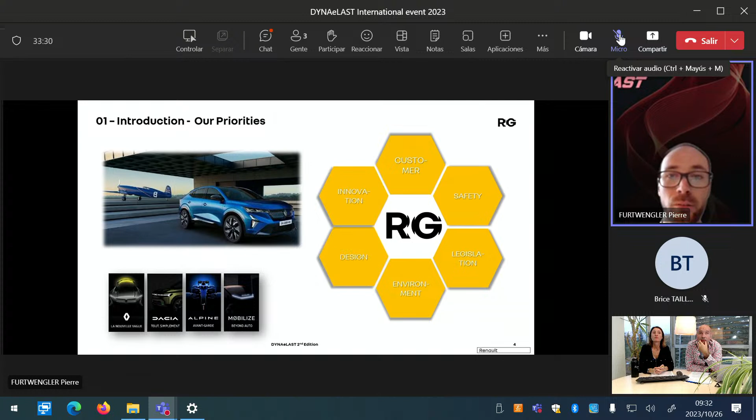Since 2020, we have a new CEO. Maybe you haven't heard about him. His name is Luca de Meo, and he started a new program called the Renaulution, which is from volume to creating value. For this, he created new entities inside of the Renault Group. So now we start to be divided into several entities.

So we have Horse, which has been created in July of this year, dedicated to low emission thermal engines. Then we have Ampere, dedicated to electrical vehicles, which should start in November of this year, so in 2 days. And then we have Alpine, dedicated to sport cars, Mobilize for new mobility and services, and the future is Neutral, which is dedicated to the circular economy.

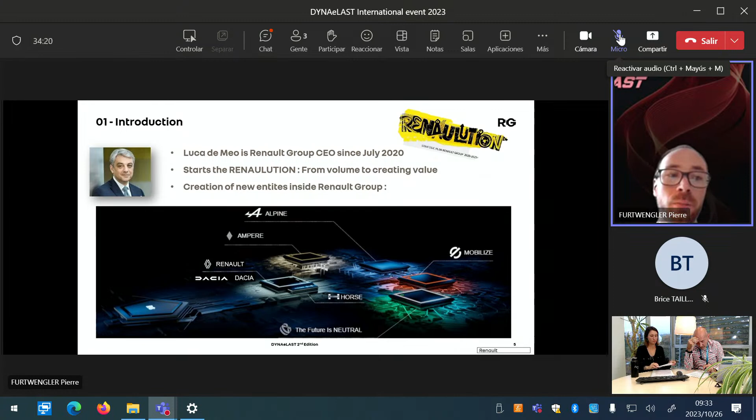Now let's talk about the Renault Group green policy. So as most of the big companies in Europe and in the world, we have to commit to decarbonation. Our road is quite simple in word, in theory, in practice not so much, but in 2030, we want to reduce our CO2 emission by 30% and increase by 33% the recycled material content in our car versus 2019. Then we want to reach carbon neutrality for all cars produced in Europe in 2040. And then we want to reach carbon neutrality worldwide in 2050.

To achieve this goal, we have several leverages, and now I will focus more on the material aspect, especially the polymers.

So first of all, we will start with this pyramid. This is the summary of our Renault Group green material strategy, as a philosophy, which means for Alliance specification philosophy. So you can see on the very top of the pyramid in red what we consider to be the least green solution, meaning the polymers with the highest emission of carbon dioxide.

In this category, you will find what we call the virgin polymers, so all the conventional polymers we are used to having. And then just under, you will find the post-consumer chemically recycled polymers, so the polyolefins and the technical polymers. This solution today doesn't seem to be too green for us, even if it is a recycled one, because the chemical recycling process still uses lots of energy, lots of chemicals, washing steps, and so on. So it is not so green at the moment, and it costs a lot, so it's not very good for us. But this is something we hope will change in the future.

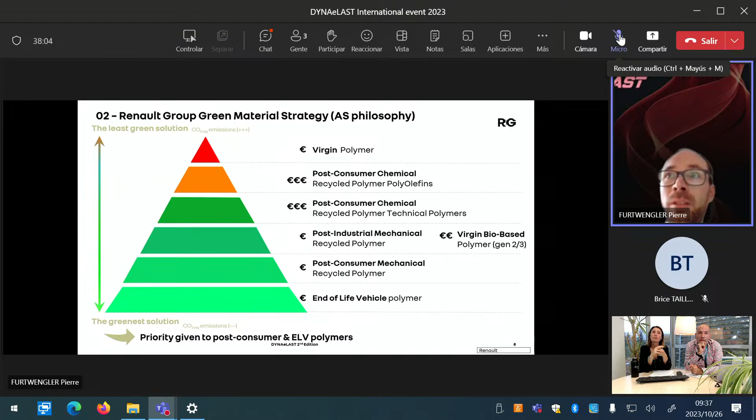Now, you can see on this screen that I'm talking about bio-based polymers. Bio-based polymers is something which is, let's say, quite complicated to accept for us, because we have to dedicate a clear strategy for the bio-based polymers to be sure not to go in a wrong direction. By this, what I mean by a wrong direction, we built a strategy which is based on the sustainable goals of the United Nations. It's a consensus, not a norm or a standard.

And what we decided is that we decided not to use any biopolymer based on edible biomass. This is what we call material from generation 1, which you can see here on your screen. We don't accept this kind of material because there is competition with the food chain, so we cannot accept to have any polymers from this category in our car. We don't want to have people asking why Renault is starving populations just to produce cars. So this kind of material, if you have a biopolymer made from corn or from whatever you want, from sugarcane, we cannot accept it. I'm sorry for that.

The other generations we have are generation 2A, 2B, and 3.

This generation, I think you start to know this denomination because we are not the only one to use them. So we can accept what we call material from generation 2A. It's by-produced in parallel of generation 1.

We will always ask for proof of traceability and sustainability, because it's okay to use byproduct, but we don't want to create an excessive production of one specific crop in the world just to have the byproduct, because it will make not a good balance between the production, and we cannot accept that either. So it is okay for us to have this material, but we need to investigate and be sure it is completely right according to our specification.

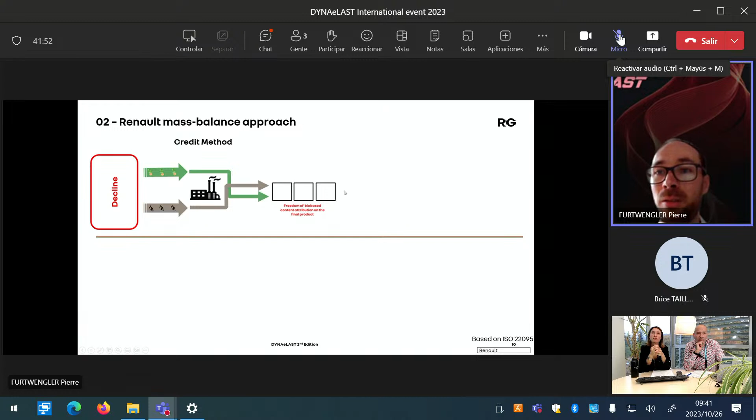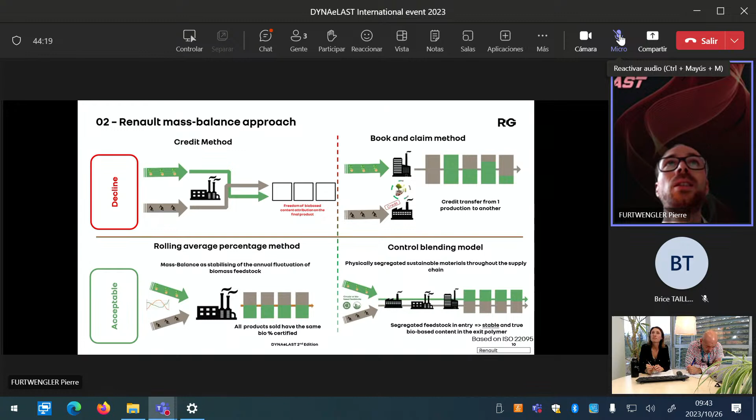As a conclusion, we do not focus on what we don't want. We want a clear positive view. We will accept everything that allows for true CO2 avoidance: mechanical recycling, renewable polymers as long as they're generation 2 or 3, post-consumer recycled material, and chemical recycling. But what we cannot accept is a credits method. We always want to be as close as possible to the truth. And we also cannot afford overcost on material just because it's bio-based or recycled—our cars are already expensive enough for our customers.

Now let's talk a bit more about TPE, especially TPE in electrical vehicles, and how they can help us on the decarbonation road, how they can help decrease CO2 emissions. Here you have an electric car, and the main difference with the internal combustion car: with a classical engine, to decrease CO2 emission you just had to decrease the weight or decrease engine consumption, and that was enough—you were decreasing your CO2 emission.

With an electric car it's much more challenging, because you have to work on the car assembly and maintenance, on low-emissive polymers and metallic parts, low-emission oil and grease, and also use bio-based materials, recycled ones, green chemistry and processes—for example in the battery—and bio-based coolant. So the strategy to decrease CO2 emissions of an electrical car is not the same as for an internal combustion engine car.

To give you a quick overview of the TPE parts in our car, we have several hoses, mainly in TPV. They can be recycled or bio-based compounds with low global warming potential—low GWP because in most cases they replace EPDM, and EPDM, due to the curing step and process which is closer to a batch process, has higher emissions. So each time we can replace EPDM with TPV, we decrease the CO2 emission of the car.

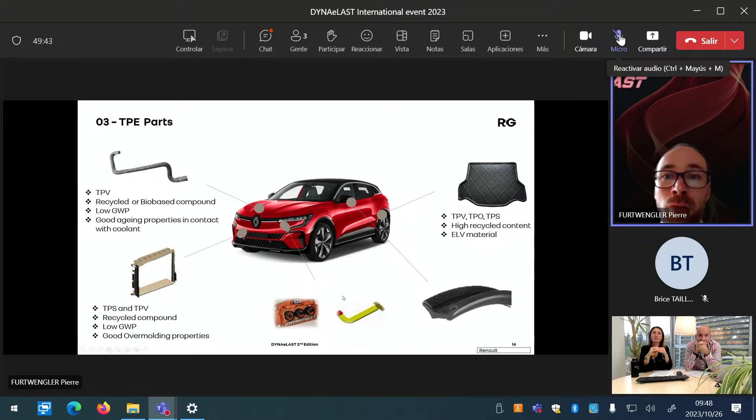If, unfortunately, a car has an accident, whatever it is, a crash or a defect, there is legislation that says that after a thermal incident, because you often have a thermal incident in your battery when you have a crash, you cannot have smoke inside the passenger cabin for at least 5 minutes, to give time for the passenger to escape.

So what can be at the origin of this thermal event, which can create this kind of incident in your car and battery? One example of interest here is the additive package you are using in the TPE formulation. We cannot use TPE close to the electric part or to the battery which have copper halide or red phosphorus inside the compound.

Why this? Because with water, you can have migration of the copper ion, and this can allow transfer of electricity between two parts. If one part is unfortunately close to the cathode and the other is close to the anode, you will have a short circuit.

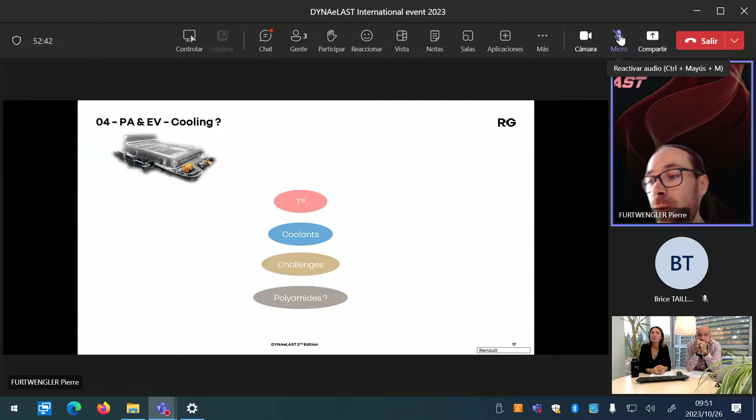As a short introduction, let's make a comparison between fuel cell and conventional electrical vehicles. First of all, the temperature of usage is not the same, because for the battery, if you are above 60-80 degrees, your battery is basically dying, it's not working well. So the battery is cooled with a conventional water glycol coolant, especially with a bottom plate under the battery. We can also imagine a dielectric coolant for direct immersion of the battery, but it is not currently used at Renault.

What is the main challenge for a battery? It is not the temperature, as you can see, but it is the high solicitation, especially of the cooling circuit, because you are cooling the battery when you are charging and also when you are discharging it. So you are almost always using your battery in an electrical car.

So what can be the challenges for TPE? It's TPV with recycled hydrolysis resistance, TPV with multi-layer hoses, and all the connections to the battery - mainly focusing on the cooling system because this is where you have the most TPE, but it can be other parts too. It has to be well designed for long-term hydrolysis resistance or long-term aging data, because even if the temperature is not so high, it's used most of the time.

Second aspect is for the fuel cell. So with hydrogen, what is the difference with the fuel cell? Currently, the fuel cell temperature starts at 80 degrees. It will certainly improve in the future to increase the yield of the fuel cell, but let's say that today it's 80 degrees. What is very important for the fuel cell - I mention the coolant here, but it's also true for the other circuits we'll see after - is to have a low conductivity water glycol coolant. Why? Because we don't want interaction between the fuel cell and the conductivity of the coolant, so it's important not to increase the conductivity of the coolant.

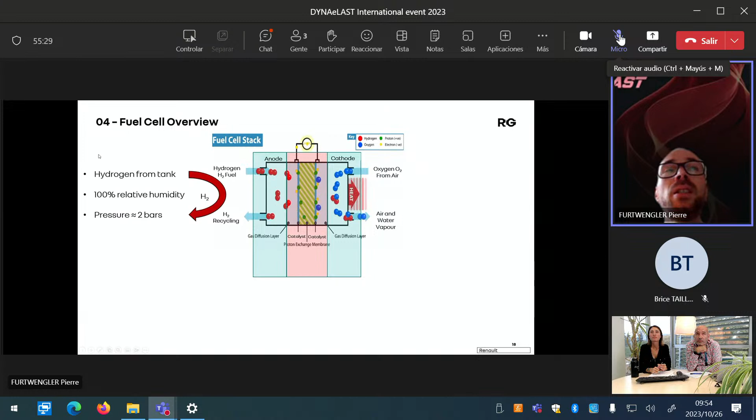On one side, you have an entry from the hydrogen tank. The hydrogen is not at the pressure of the tank, obviously. It is only 2 bars with 100% relative humidity at the anode. At the cathode, on the other side, you have dioxygen from the air, also at 100% relative humidity and 2 bars of pressure.

And the last circuit you have, very close to your fuel cell, is a cooling circuit with a conductivity set at a maximum of 5 microsiemens per centimeter, and we have a very high cooling rate.

All this circuit has hoses. These hoses can be in TPE, which is not a problem for us. I think 2 bars is okay, and 100% relative humidity is not a problem either.

But what is a problem with the humidity, whether it is in the oxygen, the hydrogen, or the cooling circuit, is if you have leaching from your material. So if you are taking some ions, some impurities, which will go inside of the fuel cell stack. Why don't we want to have this type of contamination?

Here are examples of contamination that you can have. You can have cationic impurities, organic compounds, or anionic impurities. Cationic impurities are mainly ions, extracted or leached from the compound. Why are they quite bad for us?

Because one of the main catalysts of the fuel cell is platinum. So if this metallic catalyst is poisoned by one of the cations, it will not work for the fuel cell. It will instead create another reaction with these impurities. So it basically decreases the yield of the fuel cell.

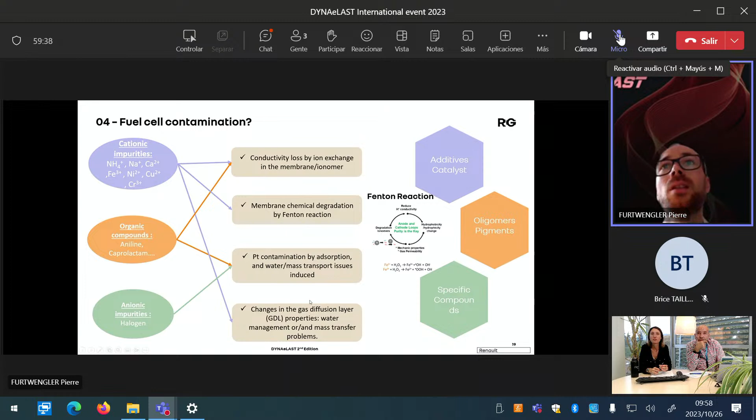In this specific idea, we started to initiate a protocol at Renault to try to investigate our materials. We share it with you because we don't know if it's the best one, so we are always waiting for feedback, and we are glad to share it if you think it's a good one also.

You can use it. So we take samples to try to always have the same surface of exchange between the sample and the media, and our media is ultra pure water. We use the ISO standard for traction, the ISO 527 1A, cut it into 2 pieces, and put them in 250 milliliters of ultra pure water in a glass bottle with a cap, and the cap must have a sealant which is not paper, otherwise you have contamination of the water.

We set the temperature at 95 degrees, and we have an aging time up to 1000 hours. Basically, it just looks like this. The purpose is to have something as easy as possible, to be very practical, and to have a good screening of all the TPE compounds we can have. So in this case, all of them are TPE.

And what we do at the end of the aging time is test mainly the water. So we test the total organic content to investigate the global ion release. We also perform ionic chromatography to investigate the anion release.

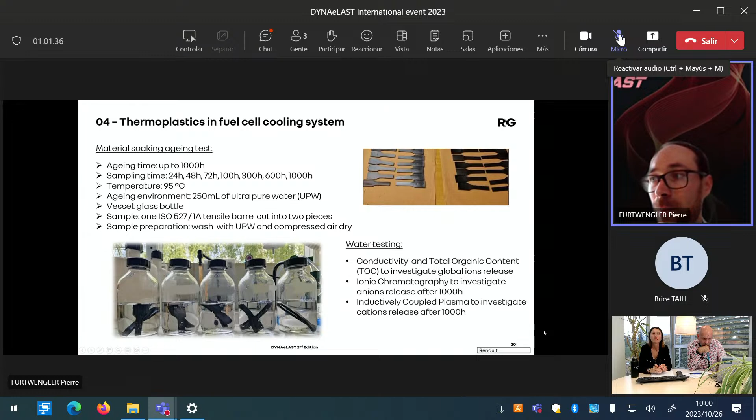Now let's jump directly to the conclusion perspective. As a conclusion, we work with lots of polymers in the car, lots of TPE, and our main goal is to decrease CO2 emissions. So our main challenges today are to decrease and use the TPE at the right place with the right formulation and the right content of recycled material or bio-based content, as long as it is not generation 1, no book and claim, and no credit method if it is mass balance.

The development and the application are on the fuel cell application and the testing method related. What we call the technical challenge is a long time projection: aging, creep, fatigue. You can think about the battery we saw in the third part of the presentation, the hydrolysis resistance - it's working for everything now - and which level of purity is required for hydrogen application, and material compatibility. We didn't speak about it in this presentation, but what is the material compatibility with pressurized hydrogen, especially at the outlet of the hydrogen tank when you are depressurizing from 700 bars to 2 bars? What is happening? Is there any cavitation, or what can be the impact on the material?

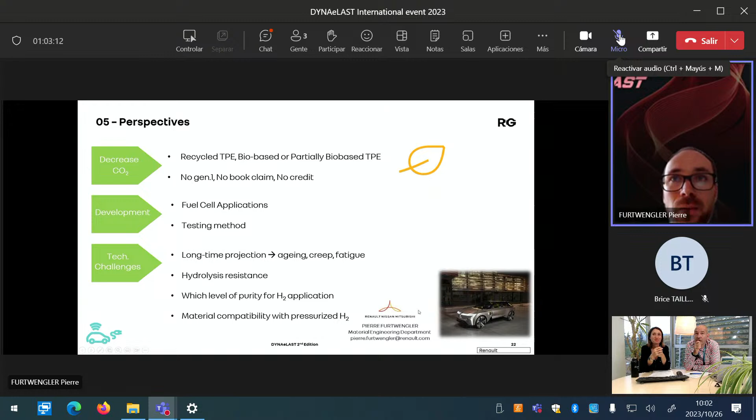This is the last slide of my presentation. If you need to contact me, you have my business card just here. Thank you very much, I hope you enjoy the presentation. And if you have questions, I don't know exactly how it works, but I will be glad to answer.

So, well, thanks Pierre, for fitting to your time. It was exactly half an hour, so that's great.

Okay, so, well, it was a very interesting presentation, and you have been presenting that you are focusing more, or neglecting or refusing, first generation bio-based materials. About the second generation, which are the most appropriate ones from your point of view, and which could be the applications for this kind of biopolymers?

So in this case, well, I can give you an example with polyamide, or with the cooling also. With the polyamide, you have everything based on castor oil, which is okay because this plant is clearly growing on an area of the world where you don't have crops for humans, and there is no interaction with the environment where it is cultivated. Another topic could be the coolant, because I talk also about the fluids - I'm expert for the polymers, but also for the fluids in Renault. So you can have coolant development where the monoethylene glycol is coming from wood.

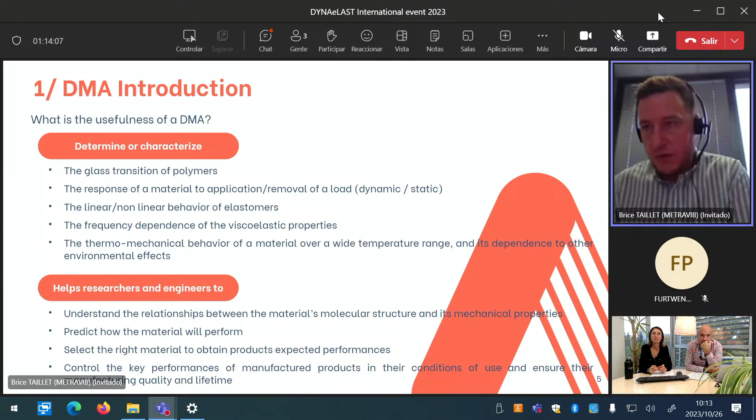So how can DMA help researchers and engineers? First, we are able to understand the relationship between the material's molecular structure and its mechanical properties. DMA can predict how the materials will perform. We can select the right materials to obtain products' expected performances, and we can control the key performances of manufactured products in their condition of use and ensure manufacturability and lifetime.

The working principle is quite simple. You have a basic schema of a DMA instrument, the DMA Plus 1000, right here. We use an electrodynamic shaker, and this electrodynamic shaker is able to apply a dynamic displacement to a specimen, and we are able, once again, to record the dynamic displacement signal and the force signal as a sinus signal.

With the displacement and the force signals, we are able to compute the stiffness of the materials. It's just a force under displacement. And regarding the shape factor of the specimen, that is to say, if we are working in tension, in bending, or in compression, in shear mode, with the modulus, we are able to compute, with the shape factor, the modulus.

And the tangent delta is just a simple combination between loss factor and E modulus. Tangent delta is representative of the damping properties of your materials. DMA introduction, working principle, quite simple.

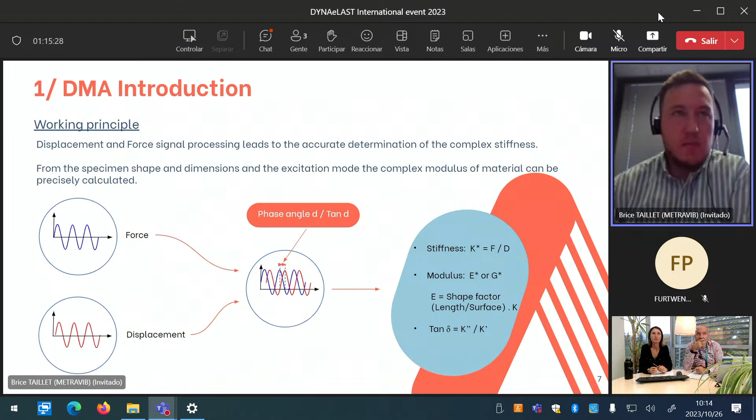So modulus is just stress under strain, and we have an elastic part and a viscous part in the viscoelastic properties. Elastic storage modulus expresses the ability to store energy. The loss modulus expresses the ability to dissipate energy in heat, definitely. And tangent delta, the material's damping.

This is a viscoelastic spectrum, for a typical amorphous polymer, as a function of temperature. In DMA, we are able to characterize the glassy plateau, the transition region, with primary transitions such as glass temperature, for instance, the rubbery plateau, and sometimes, depending on the instrument or the kind of materials, we are also able to characterize the viscoelastic and liquid part in the final region of this spectrum.

As explained, we are able to test materials according to a few excitation modes. First is tension, compression, shear, and bending. Of course, we have a lot of different excitation modes, but these are the most basic. DMA is a very flexible analysis technique to address a large variety of materials: thermoplastics, thermosets, rubber, metal, ceramics, more rarely I have to confess, film, paste, and even liquid.

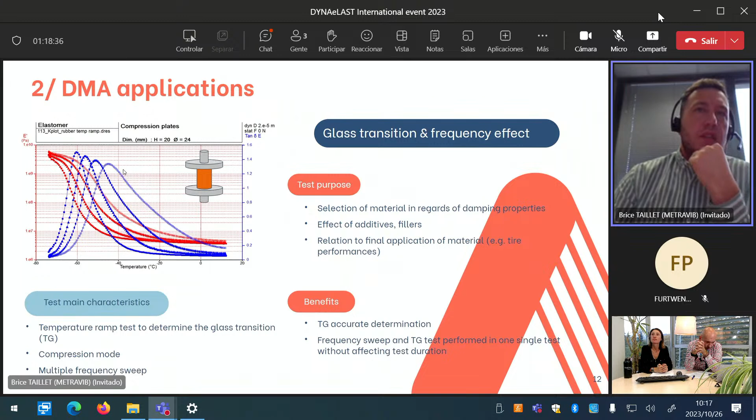Frequency sweep right now. Frequency sweep is quite a common test in DMA. Quite simple, we would like to characterize materials' frequency dependence. We are able to perform from very low frequency to a very high frequency. The aim of this illustration is to show frequency sweep from 0.0002 Hertz up to 1 kilohertz in one single measure, of course in strain control, in compression mode.

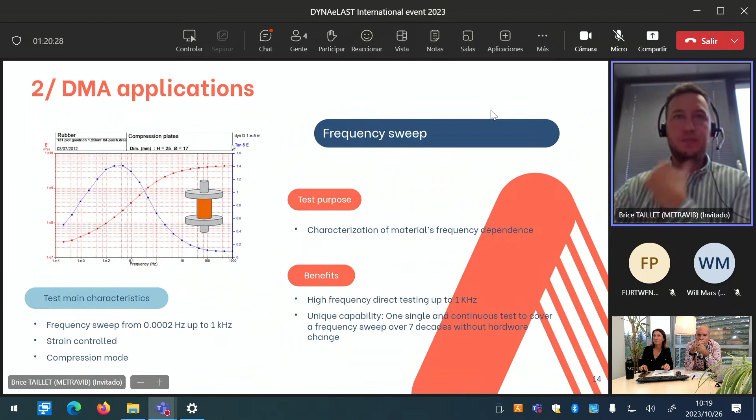One other important application is the capability to compute master curves. Master curves is just the ability to have prediction of properties beyond testing DMA capabilities. As explained, in DMA Plus 1000, for instance, the maximum frequency we can achieve directly is 1 kilohertz. But sometimes in industrial life, we would like to characterize viscoelastic properties over 1 kilohertz, maybe 10, 20, or 50 kilohertz, for instance. So the only way to have viscoelastic properties for such frequency is to compute a master curve.

One other test, temperature ramp, but on tires. I'd like to show you these curves. We are working closely with Michelin, Continental, Bridgestone, Pirelli, and DMA is used mainly for this kind of thing to get the tangent delta as a function of temperature, because tangent delta is a key predictor for tire performance prediction, that is to say the wet grip or the rolling resistance.

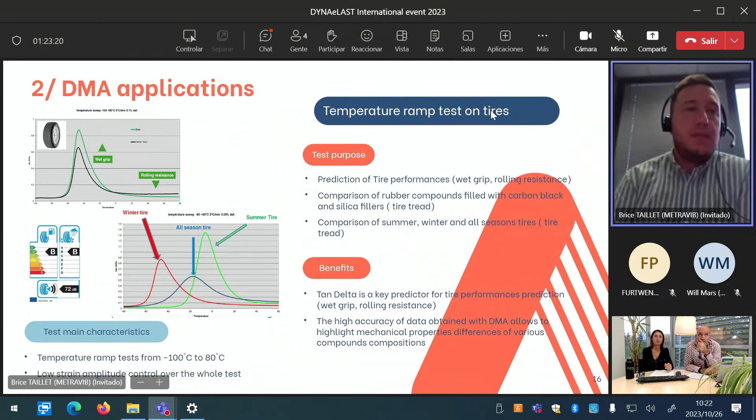Here in green we have a tire with silica, for instance, and in black a tire with carbon black inside, for comparison regarding grip in wet conditions or rolling resistance. Another interesting curve is the characterization of different tire types, winter, summer, and all-season, showing tangent delta as a function of temperature. You can easily imagine why it's clever to use summer tires in summer and winter tires in winter, because of the position of the tangent delta, which depends on the grip performance of the tire as a function of temperature.

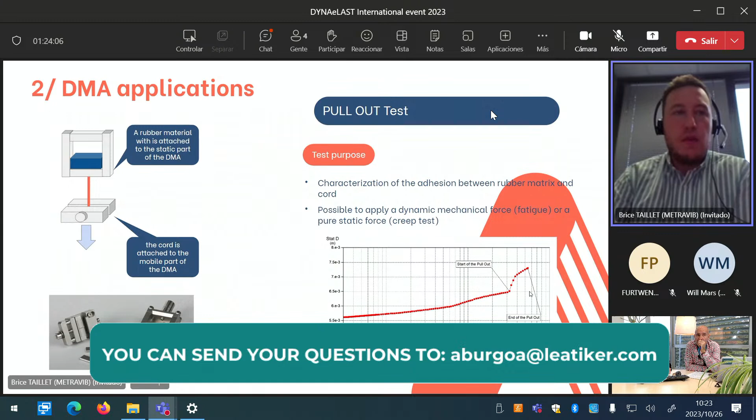One other test, quite new for us, is the pull-out test. This is the ability to characterize the adhesion between a rubber matrix and cords. This kind of test is mainly focused on tire industry, and you have the possibility to apply a dynamic mechanical force or a pure static force if you'd like to perform a creep test, and to get the static displacement, static force, or dynamic force between the start and end of the pull-out test. So it's quite a new functionality available on DMA.

So what about fatigue applications? Just as a short introduction, in industrial applications we have mechanisms we'd like to understand. We have one software able to compute and handle DMA testing and fatigue testing, named DYNAeLAST, and we're able to provide a lot of fatigue capability. I'd like to introduce three of them. The first, as you can imagine, is just standard fatigue testing, that is to say the evolution of the modulus as a function of cycle number.

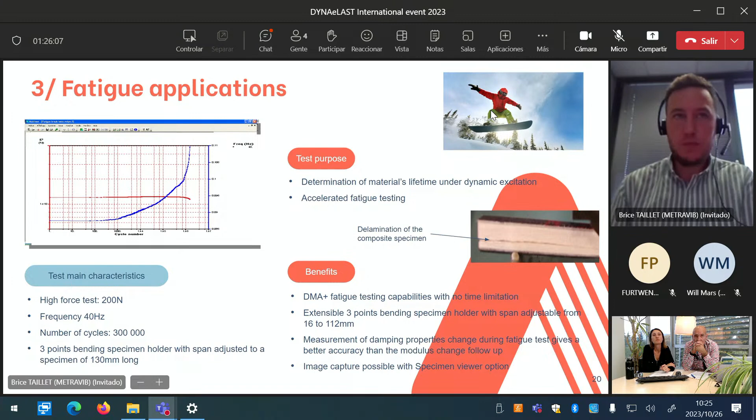One other application is the crack growth test and the automatic crack growth test. The aim of this test is to get the crack growth rate as a function of the level of energy applied.

The composition is quite basic. We use an optical system with a micrometric motorized table with lens magnification, and we are able to characterize a crack tip position with a precision of 5 micrometers. We use a high resolution video camera, and we're able to work with this kind of specimen, two dimensions available, 40 millimeter length and 80 millimeter length. With this larger specimen, we are able to follow 4 cracks at the same time.

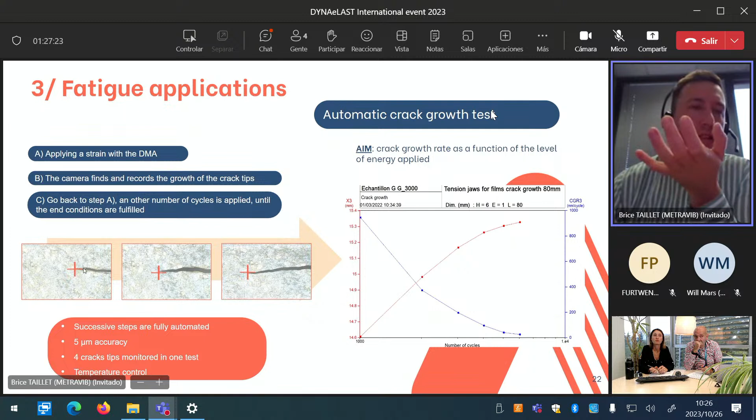The aim is quite simple. We apply a strain, a dynamic strain with the DMA, which can be combined with a static strain as well. We start to propagate the cracks, and the camera is able to find and record the growth of the crack tips automatically. The aim is to get the evolution of the crack growth, that is the red curve, as a function of number of cycles, and with the length of the cracks we're able to calculate the speed of the cracks, the crack growth rate, in nanometers per cycle.

We are able to get this kind of diagram, and this one as well, showing the level of energy as a function of dynamic displacement, peak to peak, in meters. We're able to automatically chain different levels of energy in one test. We can determine the lowest energy for crack propagation, and also determine the highest energy that a material can handle before rupture. You can see a short animation of this kind of test.

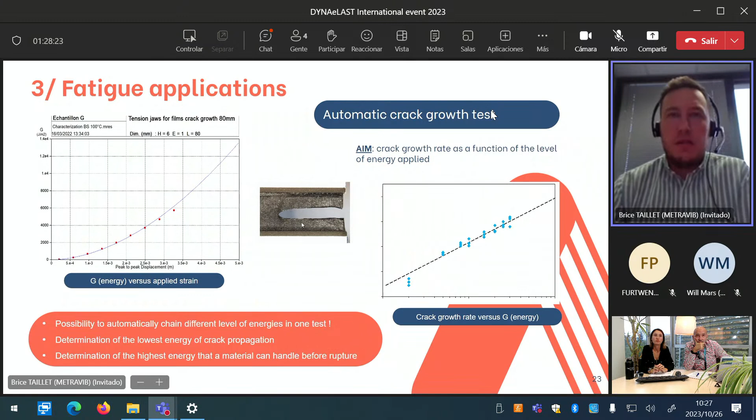Okay, one other interesting test is the heat buildup test. Heat buildup is used to characterize the self-heating properties of materials. We use fatigue testing with high strain rate for this.

We use a specific specimen holder in order to get the temperature just on contact on the plate on the rubber specimen, and we apply a fatigue test. After the fatigue test, we inject a needle inside the specimen in compression to get the internal temperature. That's the evolution in green that we can see on the illustration.

We finish the fatigue test at 66 degrees, and after pushing the needle into the specimen, the internal temperature is above 125 degrees. It's just to characterize the self-heating properties of your materials. Once again, really focused for rubber, and really focused for the tire industry.

So, case study. I would like to introduce a case study focused on squash balls. I would like to explain how the DMA can be useful in a concrete test. For this, we asked Decathlon. Decathlon is one of our good customers, quite a partner actually with Metravib. They provided us 3 kinds of squash balls: beginner, intermediate, and expert, with classic configuration.

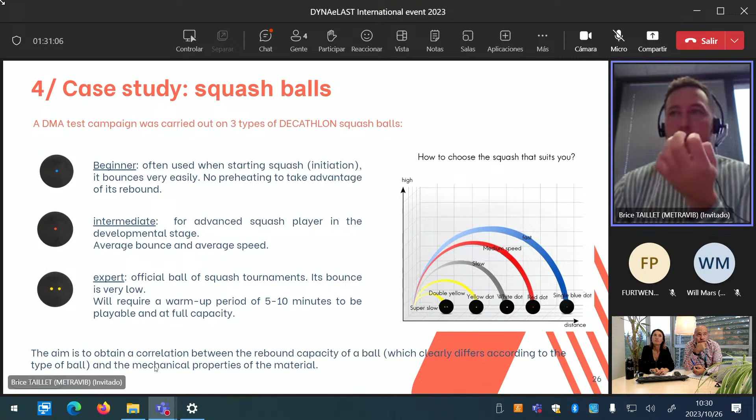So the aim is to obtain the correlation between the rebound capacity of a ball and the mechanical properties of materials. For this, I introduce you to my dear colleague Mathieu.

For this, we drop the beginner and the expert balls at the same height, and of course you can see that the blue one shows a much higher bounce than the expert one. Just to compare expert and beginner balls.

If we compare the same ball but not the same temperature, we can see that the hottest ball, this one, bounces really high in comparison with the standard temperature one. So once again, how do we translate this observation into measurable experimental parameters in DMA?

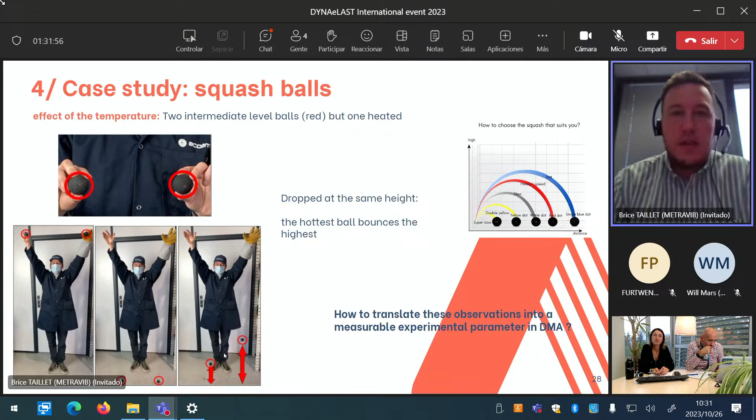For this, we use a DMA plus 1000. We apply a dynamic displacement of plus or minus 50 micrometers, that is to say, in the linear behavior of your materials. No static force. The balls were glued between compression plates. We use a frequency of 20 Hertz, and the temperature range was minus 70 degrees up to 100 degrees. We apply a temperature sweep.

As we can see, the evolution of the modulus E prime as a function of temperature on the three balls. I just located the operating temperature range during a match. As a reminder, E prime is the ability to store the mechanical energy supplied. And for this, we observe no significant difference.

Okay, the same for E double prime. E double prime is a loss modulus. Once again, I located the operating temperature range, and E double prime is the ability to dissipate energy by heat generation. E prime decreases with the temperature.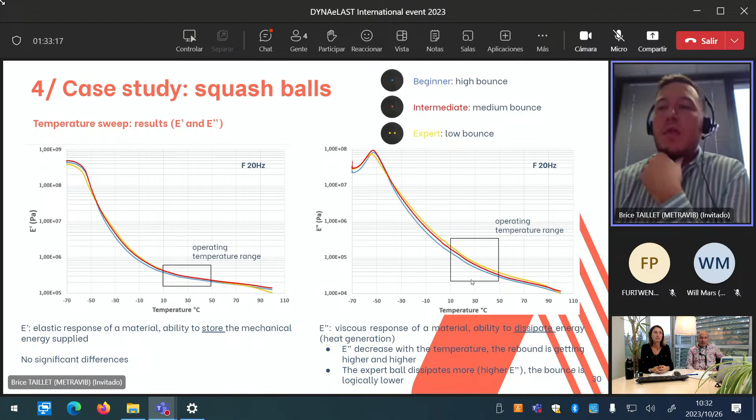The rebound is getting higher and higher. That's totally normal, and it's not really obvious, but the expert ball dissipates more. The bounce is logically lower, as you can see here.

More interesting, if we look at the tangent delta. Tangent delta is a factor corresponding to damping properties. Once again, the blue is the beginner, the red is the intermediate, and the yellow is the expert one.

We can see that the balls' formulation have two distinct compounds because we observe 2 Tg peaks. The proportion of these compounds is quite different depending on the ball's level. For this, we have to look at the dynamics of the Tg peaks.

The first peak is higher for the beginner ball, while the second peak is really higher for the expert ball, influencing the viscoelastic properties. So expert balls with a higher viscous component bounce less than beginner balls, which are characterized by more elastic behavior. It's quite obvious.

Then we apply heat build-up analysis to get the self-heating properties, as you can see on this animation. Testing condition is 25 Hertz and dynamic displacement is plus or minus 2.5 millimeters. We perform this test on the beginner and the expert one, and this is the results.

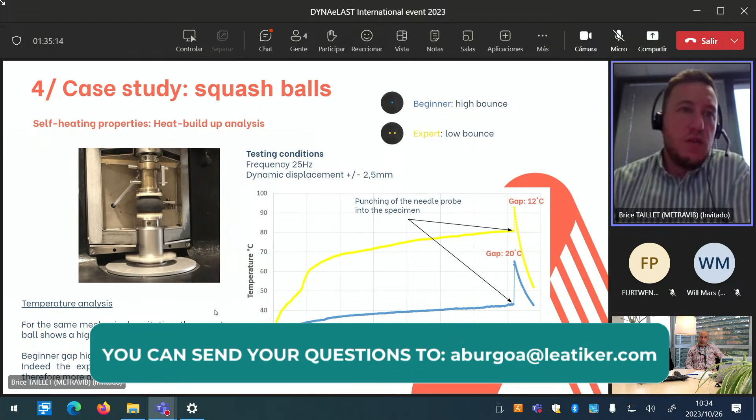The evolution of the temperature at the surface, and at the end of the test we inject a needle to get the internal temperature. The gap between the surface and the heart of the specimen for the expert one was 12 degrees. The gap is much higher for the beginner one, about 20 degrees. So once again, the beginner gap is higher than the expert one. This is totally logical because the expert ball is more viscous and therefore more able to dissipate. We can easily show this aspect with this kind of test.

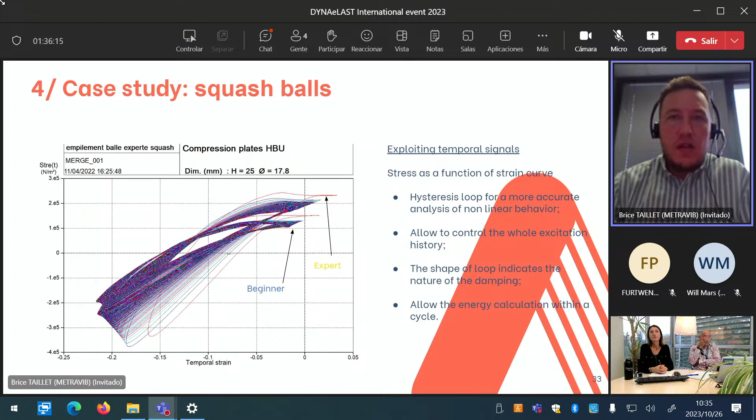Last test we perform on this is exploiting the temporal signal. The temporal signal is dynamic force as a function of dynamic displacement, or dynamic stress as a function of dynamic strain. The aim is to visualize and get the hysteresis loop, to get once again a more accurate analysis on nonlinear behavior. We control the full excitation history, and the shape of the loop could indicate the nature of the damping, and it could allow the energy calculation within a cycle. And of course, the loop for a beginner ball is much different in comparison with an expert one.

Okay, our range of products. I would like to introduce our range of products because we are talking right now about DMA Plus 1000, but we are producing such different DMA instruments. We have three kinds of different families for this.

The low force DMA named 25 and 50. It's just quite a low force DMA, really easy to use, very convenient, a really cost-effective solution. We are able to perform all DMA standard characterization, such as frequency sweep, strain sweep, temperature sweep, master curve computation, creep relaxation test as well. Our main customers for this are universities and private laboratories, and the aim is to have a pedagogic vision for this application.

DMA Plus series is a high-end, high-force DMA. We have three different instruments named DMA Plus 300, 1000, 2000, depending on the level of dynamic force available. DMA Plus 300 is plus or minus 150 Newtons, for instance. For DMA Plus 2000, it's plus or minus 1000 Newtons.

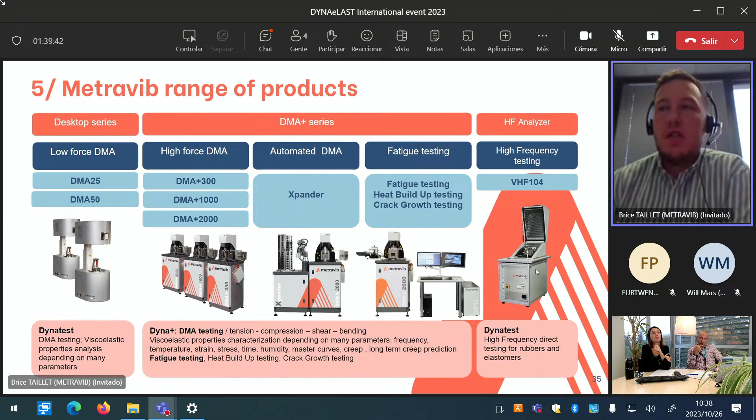Just to explain, computing a master curve in DMA requires maybe 5 or 6 hours of testing with a lot of liquid nitrogen consumption. For VHF, we just need 15 minutes to get the whole viscoelastic spectrum up to 10 kilohertz. So it's much more convenient. But the limitation is the shape factor, because we are only able to work in compression mode. We don't use any tension mode or shear mode with VHF. That's a limitation.

As a conclusion, with DMA we can get the modulus in E prime, E double prime, or G prime, G double prime, depending on the excitation mode we use. We're able to compute the tangent delta, which is a unique factor to determine the damping properties. Glass transition is a main application for DMA, but we are also capable of getting the Payne and Mullins effect, the frequency effect, and the curing process, because we are able to work on resin.

I didn't show any case on this, but we can follow reticulation during a temperature stage, for instance. For static tests, we can control environment, immersion, humidity, and we can compute master curve, but in creep this time. We can also add some fatigue capability in order to control the waveform, for instance with heat build-up, with heat build-up and flexometer at the same time, with crack growth as well.

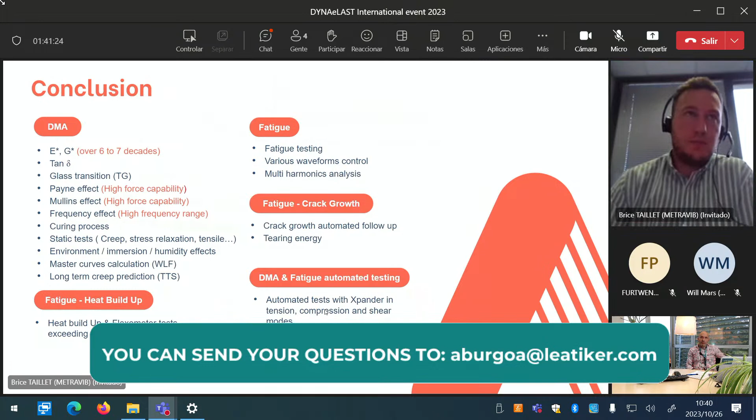And now the system is fully automated to get the tearing energy. And of course, we can also add an Xpander to robotize DMA testing and to chain DMA and fatigue testing as well.

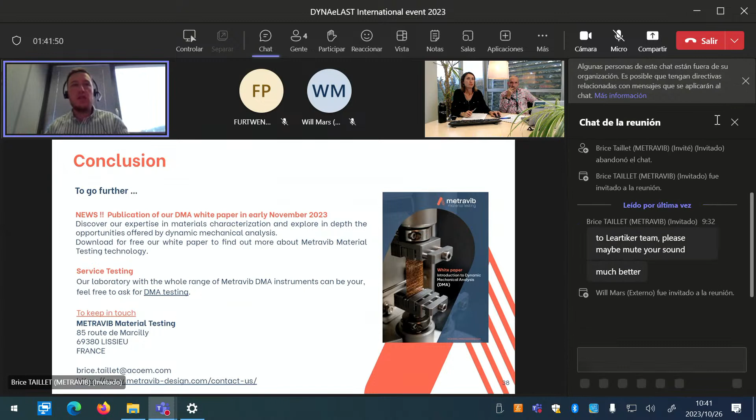To go further, I'll take the advantage of this DYNAeLAST event to introduce our new DMA white paper. We built this document a few weeks ago, and it will be released on our new website by the beginning of November. Please be my guest, feel free to download it. We bring a lot of information regarding DMA technology, how to use the instrument correctly, and a lot of golden rules to operate DMA easily. For this, you can get in touch directly through our website.

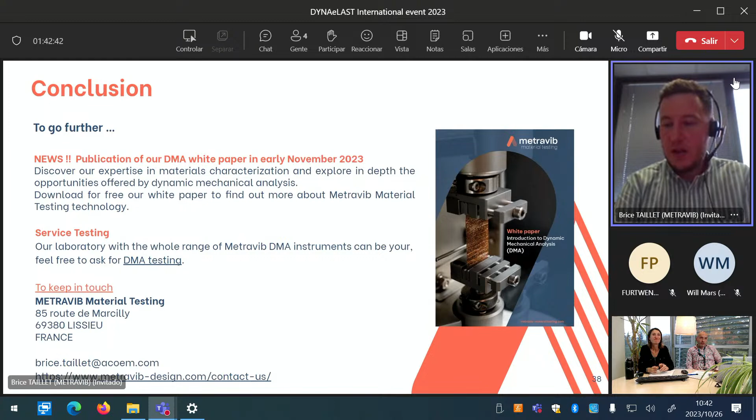You're also invited to contact my Leartiker friends if you need it, or directly me. You have my email address right here. And the last point is about our service testing: we are based in France, in Lyon. It's quite a nice city. We have a laboratory with a wide range of DMA instruments and other instruments that can be used to produce DMA testing. Feel free to ask. Many thanks for your attention, I'll be glad to answer your questions if you have any.

The temperature range is quite important to understand because of the glassy plateau and the rubbery plateau. We have two ways to decrease the temperature in DMA. For the maximum temperature, depending on the thermal chamber configuration—whether we use a window, an infrared window, or a totally closed thermal chamber—the maximum temperature we can achieve inside is 500 degrees, so from minus 150 degrees with liquid nitrogen up to 500 degrees. We also have an alternative secondary cryogenic source called an air chiller; the minimum temperature we can reach with it is minus 70 degrees inside the thermal chamber, and its main advantage is that it uses only compressed air without any liquid nitrogen. So again, it depends on the needs, on what kind of materials we're talking about, and on the installation requirements in a laboratory.

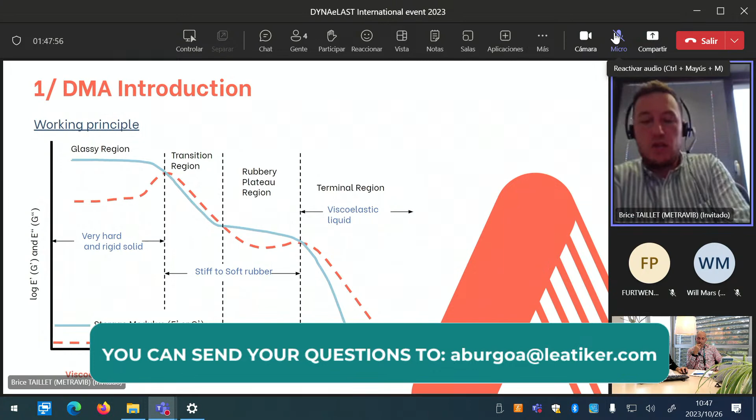Well, we don't have more questions, but I have one question from my side. As in DYNAeLAST, we are targeting elastomers and dynamic applications. Which would be the excitation mode to be applied in elastomers if we want to characterize elastomeric materials?

Once again, depending on the needs, but more commonly, shear excitation mode is a perfect one, compression as well, and tension, of course, as well. If we are talking elastomers and dynamic properties, we are only thinking about the tire industry. For instance, Michelin uses shear mode, but Goodyear, for instance, is more focused on tension and compression. Pirelli, depending on what kind of tires they would like to test, but the more common ones are shear, tension, and compression.

Thank you, Brice, for the clarification.

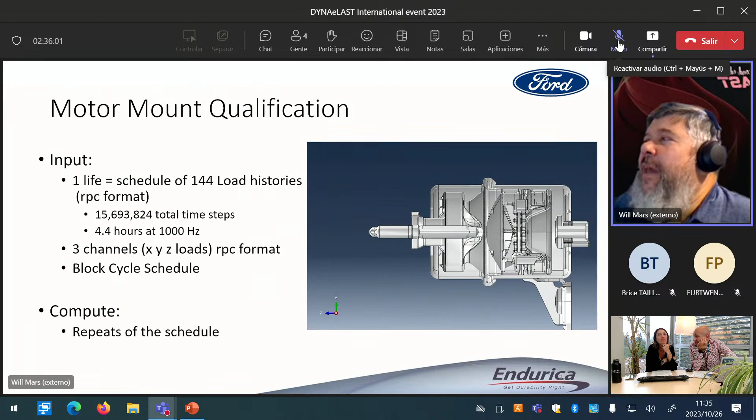We'll be able to see how the workflow goes, and also a typical example of what the computational requirements are for doing this sort of thing. The image on the right shows the mount in cross-section view.

In order to solve this problem, there are a couple different tools that we're going to use in the workflow. CL, DT, EIE - these are what we call our fatigue solvers. Each solver has capabilities that we'll use in different parts of the workflow.

The CL tool is the core fatigue life calculation. That's where we set up our material models - it's the core workflow. If you only use CL by itself, it's a post-process, and CL by itself can do one use case. Of course, we have a schedule, which means we need to accrue damage incrementally.

That means we're going to need the Endurica DT add-on to CL as well. The DT solver allows us to accrue damage across a schedule. It allows us to calculate residual life. If we want to take into account changes of material properties with time, we would use Endurica DT for that.

The final tool we're going to use is called EIE. That's an acronym, and it stands for Efficient Interpolation Engine. You could think of EIE as a method for managing the very large number of time steps you have when working with track data - those signals are so large that it's not realistic to try to directly model them in Abaqus, but with EIE you can do that.

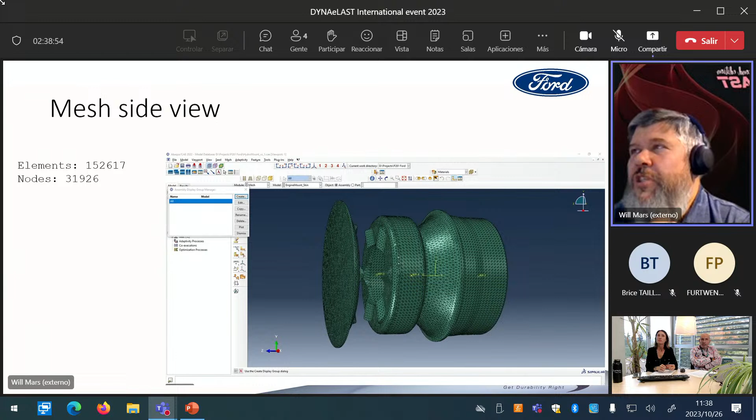The model of the mount is shown in this image. We're using hyperelastic materials, with contact defined here. We have about 150,000 elements in the model and 30,000 nodes, just to give you a sense of the scale of the problem.

Here's another view with the external can or cylinder removed. There are two meshes - we've analyzed both the solids and the membranes. We paved the surface of the solid model with membrane elements because that helps us derive more accurate stress-strain states on the free surface of the mount.

Because we expect cracks to initiate on the free surface, we want to get accurate stresses and strains on that free surface as much as possible.

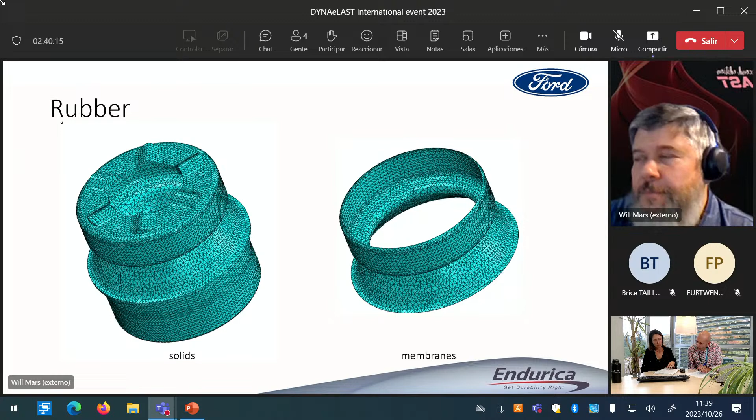By the way, it's a natural rubber - I should mention, a filled natural rubber.

Now, in addition to stress strain behavior, if we're going to do fatigue analysis, we need to specify the fatigue properties of the material. What you're looking at in this slide is an example of the fatigue crack growth rate curve on the left - a plot of the crack growth rate as a function of the energy input, just like the Metravib folks were talking about in the last talk. On the right, you're seeing what's called a Haigh diagram.

The Haigh diagram is an output from the simulation, but it basically shows the effect of mean strain and strain amplitude on fatigue life. So where you see blue, those are combinations of mean strain and strain amplitude where the life is very long. And where you see red, those are combinations where the life is very short. So you could think of this as just a contour plot showing how fatigue life of, let's say, a tension strip depends on mean strain and strain amplitude.

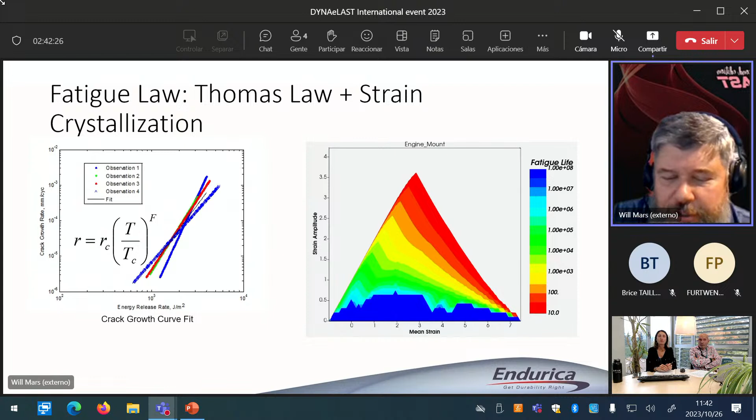In order to define that plot, we would also need to define the crack precursor size. And in order to do that, we will use crack nucleation experiments.

In order to, as you change the precursor size, those theoretical curves will shift to the right or to the left. And the way we identify the crack precursor size for the material is by choosing the precursor size that lines up the calculated curve from the crack growth rate law with the observed crack nucleation data. In this case, that gives us a crack precursor size of about 12 microns.

Now, once we've defined the material behavior, before you do a fatigue analysis, you ought to make sure that your finite element model is behaving reasonably.

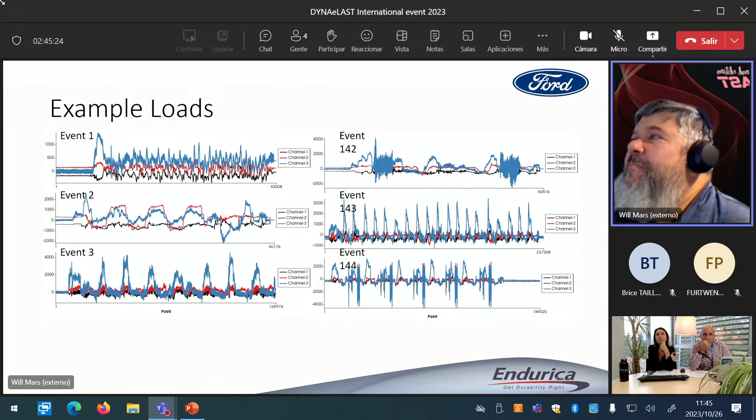And at this point, we're ready to go ahead and start working the problem. To do that, the first tool we're going to use, as I mentioned, is EIE, the Efficient Interpolation Engine. There are really 4 major steps to doing that.

The first step is to build what we call a map. Basically, the map is a set of pre-computed finite element results that summarize what the stress strain state is for the part over every possible point in the operating load space. Once you've set up that map, then you're ready to go ahead and do the interpolation.

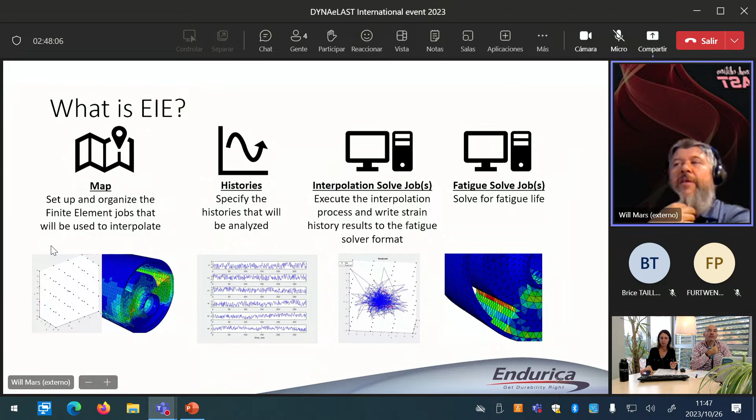The next step is to bring in the load histories that you want to analyze. Again, those can be specified as CSV or RPC files. Once you've set up your map and your histories, then we actually run the interpolation job by playing those histories into the map. For every time step, we obtain the stresses and strains by interpolating in the load space from the nearest neighbor load cases included as part of the map definition.

What's really nice about this procedure is that it does allow us to account for nonlinear behavior. That's important because rubber is nonlinear in many ways — there's nonlinear material behavior, finite straining and kinematics, and contact. All of those different nonlinear effects can be represented using this mapped approach.

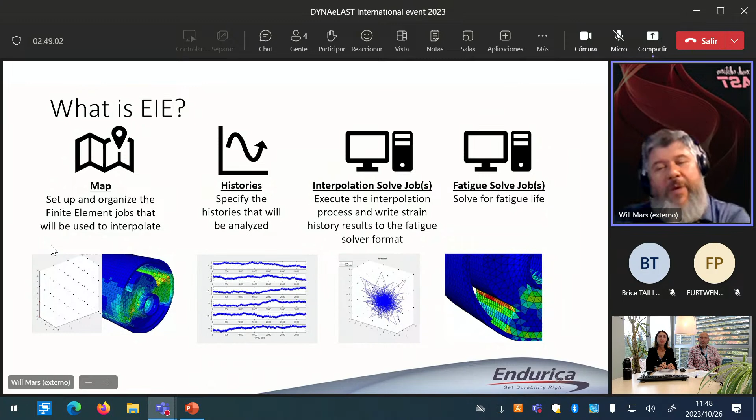And then finally, once we interpolate to get the stress strain history, the final step is to solve for fatigue life. To do that, we would use either the CL or the DT solver, depending on the requirements for the analysis. In this case, we're going to use Endurica DT because we have a schedule of 144 events.

All right, so a little bit more about this idea of a map. A map basically consists of a set of grid points. I'm showing those here in gray as an example. This would be an example of a 2-dimensional map.

So if I had 2 channels, X and Y, for example, a simple method for generating the map would be to use a rectangular grid. There's many different approaches you can use to build the map, but let's think about a rectangular grid. If I do 4 different load levels in X and 4 different load levels in Y, then I need to pre-calculate 16 different finite element solutions at each combination of X and Y in order to prepare my map for use for interpolation.

Now, when I start feeding my X and Y signal into the map, that's going to be the blue line. The points on the blue line, the signal points, are not necessarily going to fall exactly on the gray grid points. I know the stresses and strains at the gray points, so in order to get the stresses and strains on the blue line, I need to interpolate using, for each point, the nearest neighbor. So for this point here, we would interpolate from these points here. For this one here, we're going to interpolate from these points, and so on.

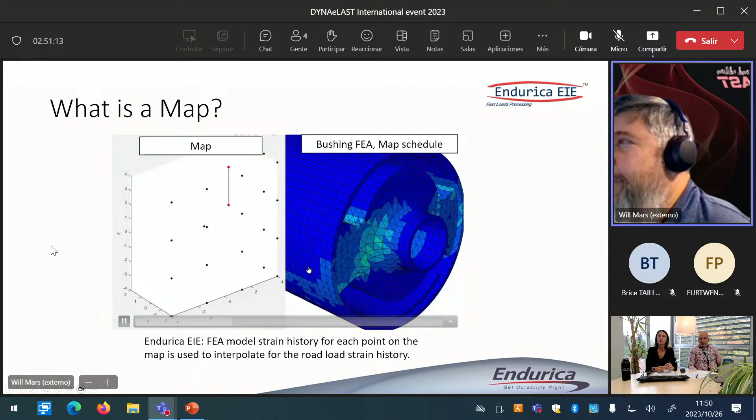As an example, here's a 3-channel signal. If we were to feed that into a bushing, you can see here the set of finite element solutions that we would pre-compute. You can see the deformed state of the bushing at each case, and we know the full stress-strain field at each of these points. The process of populating this map is what we call map building.

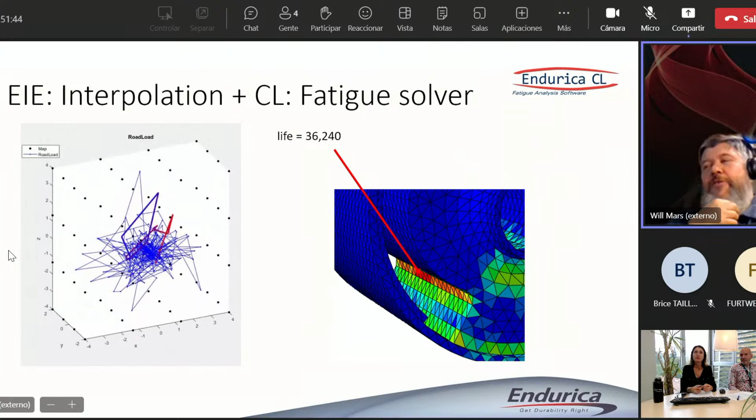After we've built the map, we can play the road load signal into the map in order to get our interpolation. Once we've done that, we can run Endurica CL, because in this case there's just one signal. CL is going to tell us how many repeats of the signal, 36,000, it takes to cause cracking in the part. It's going to tell us where the part fails, and so on.

So in order to build the map, there's a few steps. The first step is to specify the map, the number of channels in the map. EIE will support as few as 1 channel and as many as 6 channels. So if you have 3 forces and 3 moments, or they could be displacements, rotations, or moments, those can all be inputs for the map.

And then you'd also specify the map type. EIE supports different strategies for populating the map. The simplest one is this rectangular grid that I've shown, but there are other strategies that sometimes are more convenient that you can also use.

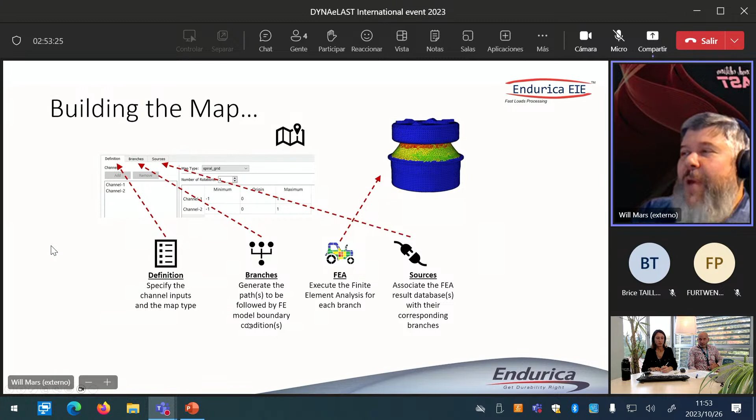Once you've specified the inputs and the map type, you also need to specify what we call branches. In order to populate the map, you're going to need to trace a certain path in your finite element solution to collect all of the results that you need for the map. So there's a step of generating this path that can be done automatically by EIE, or if you want, you can specify your own user-defined path or branches.

There might be one, there might be several branches depending on how you organize the problem. If you're trying to get everything done in one finite element job, you would have one branch. If you want to break it into several jobs, you can break it into several branches. You might want to do that if you're going to run the map on 2 or 3 different machines simultaneously, and so that might be a reason to break the job into a few pieces.

Once you've done that, you go ahead and execute your finite element job and collect all of the stress-strain solutions. Then finally, once those results databases are available, we associate each finite element results database to its corresponding branch. And at that point, the map is defined and ready to go.

So here's kind of the overall workflow. We're going to start with the full set of signals, and we're just going to look at how they fill up the operating load space. EIE is going to define our load paths in that space.

And then we're going to feed those load paths into Abaqus, in this case. We also support ANSYS and MARC, but here we've used Abaqus. The next step would be to execute those jobs.

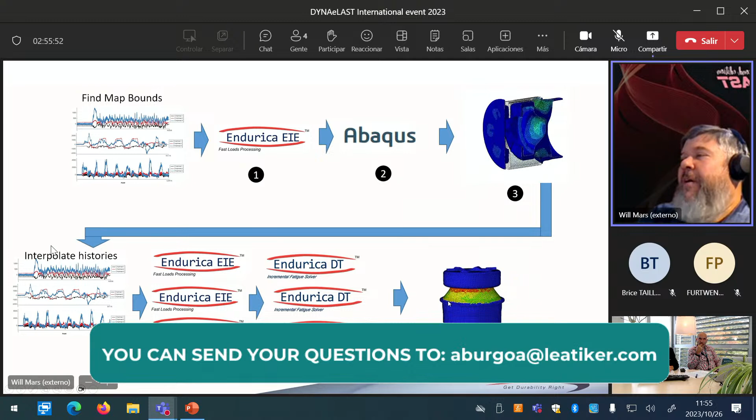Once we have stress strain history for all 144 events, we feed that into Endurica DT. For each event, we can accrue the appropriate number of repeats of each event to build up the entire schedule. Then finally, we can come out with the number of repeats of the schedule on the part and look at life and failure mode, and so on.

This is usually the most computationally intensive part of the process. In this case, the map you're looking at took us about 57 hours of runtime on 11 CPUs.

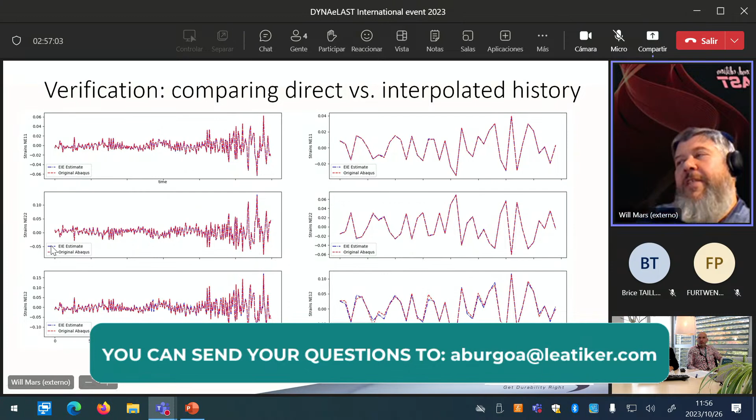One of the questions we sometimes get is whether the interpolated strains are the same as what you'd get if you did that computation directly. Obviously you can't do this for the whole signal, but we took a small snippet and ran it with a direct Abaqus analysis to see if the interpolated strains matched.

You can see the comparison is quite good. There are two lines here, but they overlay each other quite well. The blue line is the interpolated line, the red line is the direct Abaqus solution. On the right, you're seeing a zoom of one portion of the signal, so you can better see how well the signals agree.

So long as your map is sufficiently discretized, you're going to find really good correlation of your strains. But of course, the interpolated strains get computed about 10,000 times faster than you would in a direct finite element solution.

So bottom line, here are the workflow costs for this particular problem. To define the map took about 1.5 minutes. To build the map took about 57 hours of Abaqus. To run the EIE strain history interpolation took about 8 hours, running on 32 threads. That produced a file that was 3.2 terabytes.

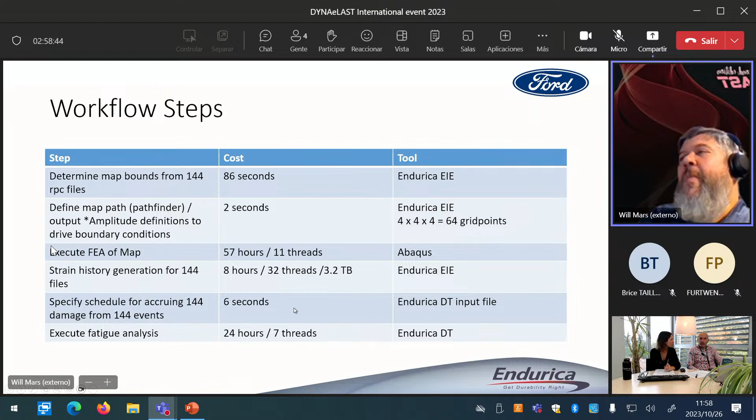So when you run these problems, you're going to need a large amount of disk space. Finally, to run the damage analysis, processing the 3 terabyte stress strain file took about a day, running in parallel on 7 threads with DT. So after all of that, for this particular part and schedule, the life came out to be about 9 repeats.

This may have been an over-engineered part, could have been light-weighted, but it does pass the verification. This was about 15 million time steps, 144 events, and 150,000 elements. If you add up all the run times, it's about 90 hours of execute time, wall clock.

All right, so I'll stop there. But this is an example showing that these days — in the past we've had to take shortcuts and make guesses — but now we're in a position to fully compute the entire qualification schedule for a part. I think that's an important capability, and the run times are in the realm of what we'd need for a production engineering context.

So like I said, I'll stop there, and if there's time, I'd be happy to take any questions.

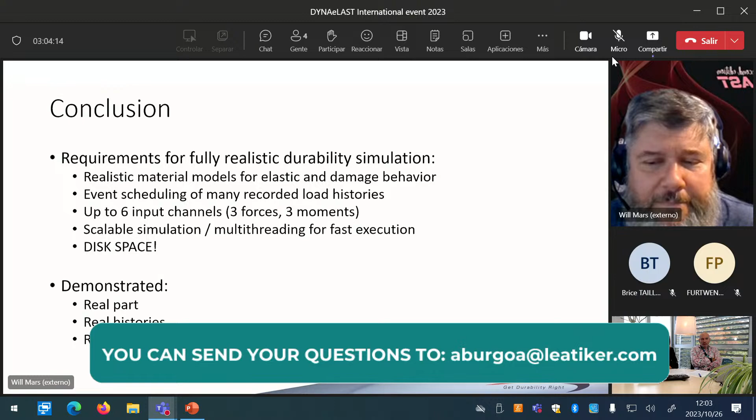I think we don't have any more questions, but a question came to mind as an Endurica user: how do we know how many points to use in the map you showed during the presentation? How can we define that number of points?

That's a matter of engineering judgment. On the low end, for a 3-channel map, you need a minimum of 4 solutions in the map. If you do that minimum, what you're going to get is a linear map - so if you define 4 solutions for a 3-dimensional map, you basically get a linear interpolation. Now, since these are nonlinear problems, you're going to have to discretize the space more finely than that.

One way to estimate the number of points is to think of how many intervals you want to divide each space axis into. In the 2-dimensional example we showed, we divided the axis into 4 intervals. So if you have 2 channels, 4 intervals would mean 16 grid points. If you have 3 channels, 4 to the power of 3 would be maybe 64 grid points, and so on. So the larger the number of channels you use, the larger the number of grid points. There's a little bit of an art to making sure you've adequately discretized your load space.

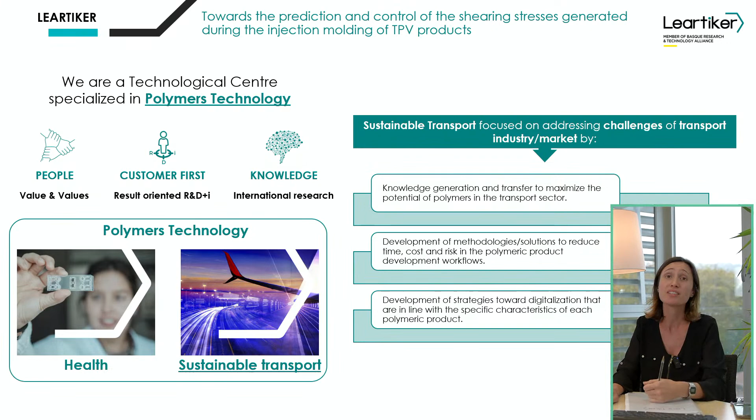We do this by, on one hand, the generation of knowledge and transfer of that knowledge to potential customers and sectors related to the transport industry. We focus our activities mainly on developing methodologies or solutions to reduce the time, cost, and risk involved in the development of advanced polymeric products and the workflows used for this. And last but not least, in developing strategies towards digitalization that are in line with the specific characteristics of each polymeric product.

We have the capability to develop new materials, perform new compounding, and design new materials. We can even do product and process development strategies, with capabilities for injection molding, compression molding, and mold and component design specific to the material selected. We have different machines to assess and characterize the thermomechanical performance of polymeric materials and components. We also have capability to predict or digitalize their static, dynamic, or impact behavior, and finally to characterize and predict the durability or lifetime of these materials and components, mainly focusing on thermomechanical performance, so fatigue and creep behavior.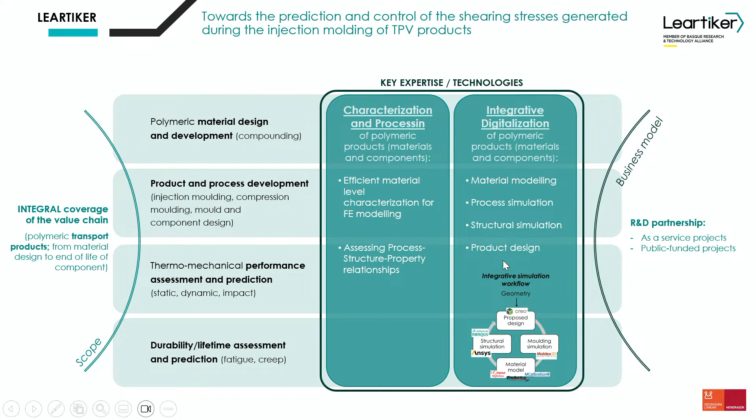And if we take a deeper look at the simulation capabilities, we can close the loop because we can do process simulation up to structural simulation, always passing through material modeling, the generation of advanced material models specific for each kind of component or material we want to predict or simulate. This way we can close the loop and consider the effect of the geometry, the effect of the process, and the effect of material selection on the final component design.

So in the case of, if we now jump to the main motivation of the topic that I will cover in the event, the main challenges of this topic.

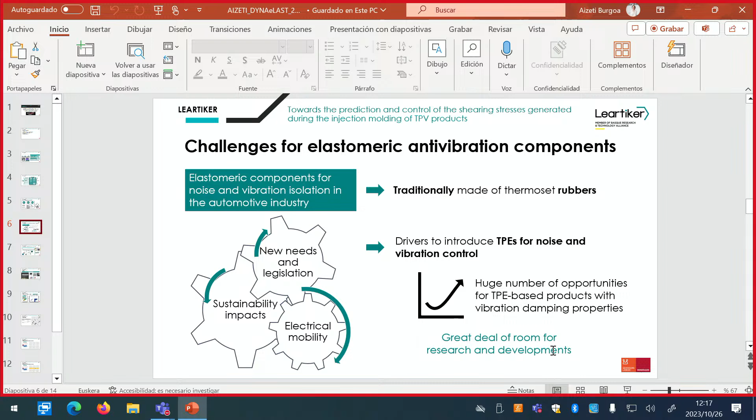So I was talking about our main capabilities, integrative simulation, modeling, but now if we jump to the main motivation of the topic I want to cover in this event, this is mainly related with the new challenges that are appearing in elastomeric materials.

As we all know, elastomers are widely employed in the automotive sector, and they represent a key material for anti-vibration components. But traditionally these are made of thermoset rubbers, not thermoplastic elastomer materials. Nowadays new requirements are appearing, mainly related with electrical mobility, that are pushing the replacement of rubber to TPE, as Pierre also mentioned in the presentation.

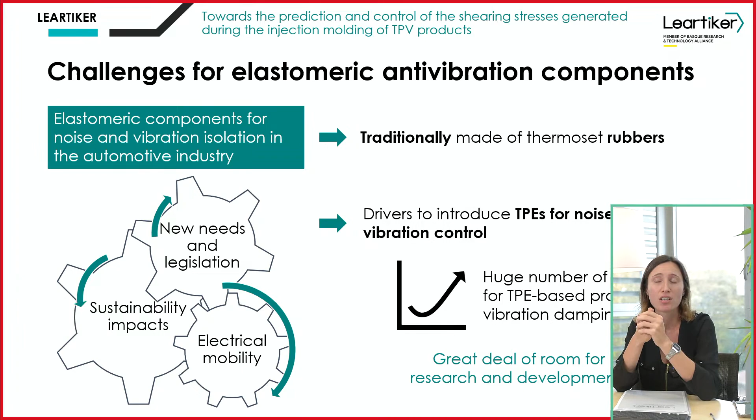So in terms of noise and vibration dampening applications, on the one hand, as we no longer have internal combustion engine noise, now the noise and vibration requirements are changing, so probably the material selection may also change. But there are also issues related with comfort, and with the weight balance and weight distribution in the car, because we are adding new components, for example the battery, and removing old ones. So these components need to be redesigned, considering sustainability impacts.

Impacts and sustainability issues related with the recyclability of materials, new needs and legislations that are appearing. In this regard, TPEs are very attractive materials because they are lightweight, recyclable, and offer high design flexibility. So there are drivers appearing to introduce TPEs for these noise and vibration control applications, and a huge number of opportunities for this kind of material for vibration dampening.

But what happens if we want to advance the use of TPEs in anti-vibration products? In this case we need to consider their unique feature, related with their biphasic structure. They usually always have two phases, a soft and a hard phase, and also very non-linear properties. So in order to redesign a new component with TPEs, we need to consider the influence of the process on this biphasic structure, and their very non-linear mechanical behavior, in order to perform a design based on the final properties, to optimize the properties we will have in the component.

So our strategic approach for an efficient and sustainable TPE-based product development is based on the development and scale-up of consistent integrative modeling and simulation methodologies for TPEs. In line with this research line, last year we started a project to investigate the effect of injection molding parameters and geometric features on the shearing stresses generated during injection molding, in this case of TPV products, thermoplastic vulcanized products, which are a specific family of TPEs.

And in this work we showed that the process conditions induce different states of distribution in the elastomer and thermoplastic materials that we have in the TPVs, and that these processing parameters can be potentially used to tune the final properties of soft TPV-based products. For example, by considering these process influences, we were able to reduce the permanent deformation, the plasticity that we can have in TPEs, giving better elastic performance in anti-vibration components, and even tune the dynamic characteristics or vibration damping characteristics of the final component.

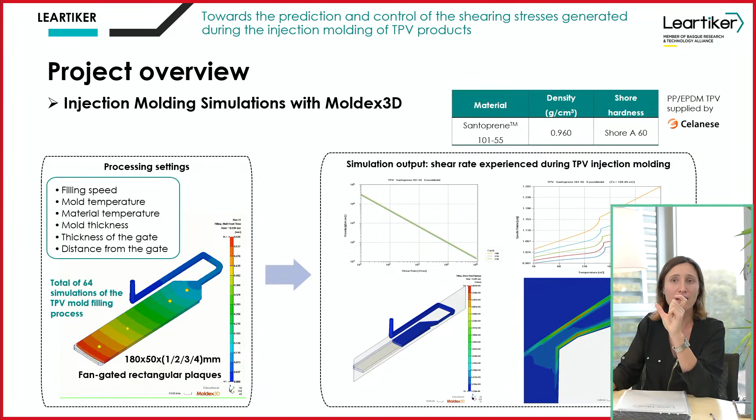Why? Because redesigning a component, shifting from rubber to TPEs, has other challenges, for example related to wall thickness. Since we are injection molding, we usually need wall thickness less than 4 millimeters to avoid warpage and void generation. We also wanted to locally analyze the effect of injection molding on the shear rate, so we analyzed the distance from the gate, looking at shear rate generation in different positions of the plate. In total, we did 64 simulations of the TPV mold filling process, and as an output we analyzed how all these process parameters affect the shear rate at different positions and for different plates with thicknesses from 1 up to 4 millimeters.

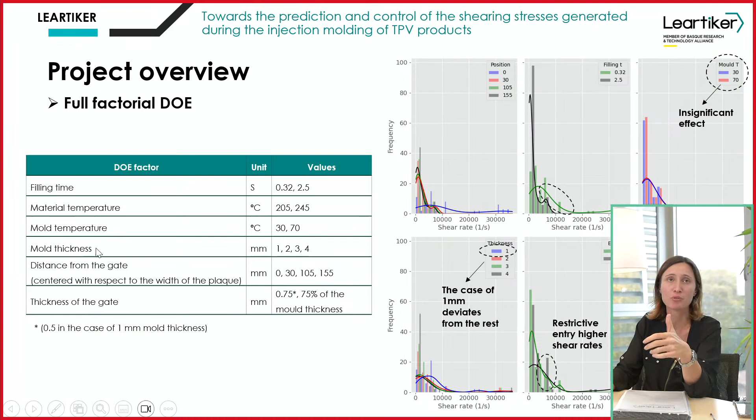Once we did these simulations, we performed a full factorial design of experiments to analyze how the different process influences may affect the shear rate, and at the end, as shown previously, the microstructure and final properties we can have. These are the values analyzed: different filling times, speeds — fast and slow injection molding — different material temperatures, mold thickness from 1 to 4 millimeters, different distances from the gate, and also the thickness of the gate, so a more restrictive or non-restrictive gate.

As you can see in the histograms, mold temperature and material temperature have an insignificant effect — these two variables have little influence on the shear rate generated during injection molding of these TPVs with different thicknesses. It was also interesting to observe, comparing the curves, that the 1 millimeter case deviates a bit from the rest. In the case of 2, 3, and 4 millimeters, the shear rate effect is similar, but for 1 millimeter, the influence of the parameters on the shear rate deviates a bit from the rest.

In terms of filling time, we can observe that a lower filling time achieves higher shear rates. This was a first approximation to the effects, but in order to go deeper into the correlations between process variables and shear rates, we also analyzed the linear correlation heat map, or Spearman's correlation, to see how process parameters influence the shear rate at different positions. This is important because in a component we want to analyze how locally the different process parameters may induce shear rate, in order to better optimize the geometry and design locally. Here we can see that if we are at the gate, the entry is the one affecting it the most.

So having a more restrictive or non-restrictive entry affects the shear rate on the gate, but not in the other positions of the plate. But the filling time, yes, the filling time has an influence on the shear rate in all the plate, not only in the gate, but also in the consecutive positions at the end or in the center of the plate.

Then here we can also observe how the thickness has influence, but mainly not in the entry, but in the other positions.

So as I said, considering this, what we thought was, okay, if we have these correlations between process parameters and the shear rates, are we able to generate a model, a comprehensive model, to predict which is going to be the shear rate in different positions of the plate, because we want to have an idea locally which are the effects on the shear rate.

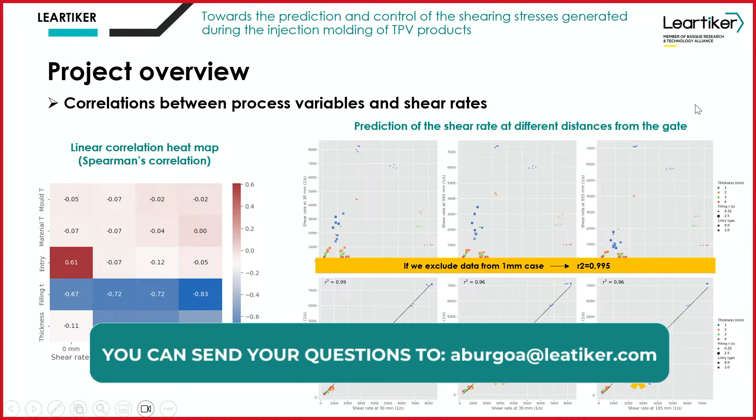So as a summary, we can see that previous studies have revealed that the imposition of different shear rates or shear stresses during injection molding can induce non-isotropic characteristics in PP-EPDM TPVs. That's why predicting the impact of these injection molding parameters on the shear stresses generated during injection molding emerged as a pivotal factor in designing TPV products optimized for anti-vibration performance and for the new requirements appearing in electric vehicles.

In the case of the project, we saw that among the analyzed variables, the highest correlation was with the filling time. It was interesting to observe that if the shear rate at a specific position other than the gate is known, a strong linear correlation exists with the other positions at plate level, which allows the prediction of the shear rate at the remaining positions.

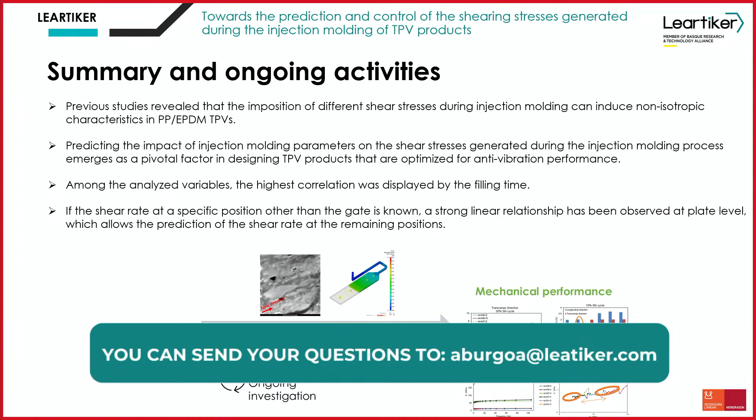So we can have a full overview of the effect of processing on the shear rate in different locations of the plate. As an ongoing activity during this project, we have been linking how the process parameters affect the shear stress and the microstructure evolution, and now we are working on how all this affects the mechanical performance.

So in these injection molded plates, we are doing different quasi-static and dynamic mechanical analysis trials to, at the end, link the process parameters with the mechanical performance, and to do a properties-driven process and component optimization, to be able to tune the key parameters that govern the performance of anti-vibration components based on TPE materials.

So that was all. I would like to thank you all for your attention, and if you have any questions during the event or after, you can contact me by sending an email to the address you can see in the slide. Thank you.

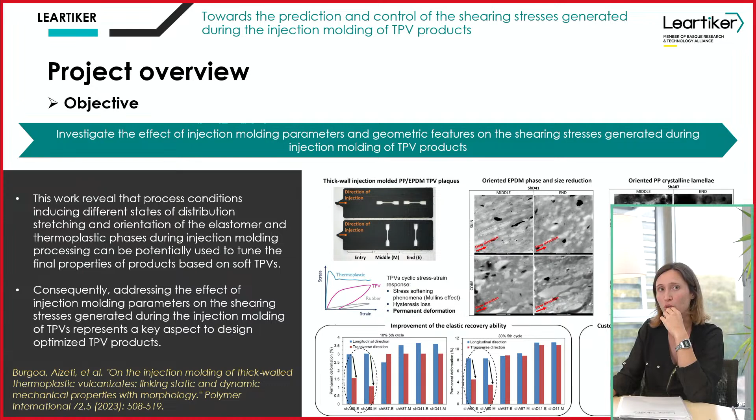So if we move to softer materials, we will have more influence on the process and anisotropic character, which is interesting because in antivibration products, this is the range of hardness that we employ. That means we will be able to tune this if we advance on this kind of strategies.

In this case it's Moldex 3D. We are using this because, on the one hand, it has a lot of materials available, so we can use the data available about viscosity and influence on melt rheology. On the other hand, it gives us this key parameter, the shear rate, even at different positions through the thickness. So Moldex 3D is the software we are using for it.

Okay, thanks. Any other questions from the other speakers? I've got a question. Yeah, great. Sure, this is Will. So my question is: for this particular material, is there a dependence of the material properties of the final plaque on mold temperature? Have you looked into that at all?

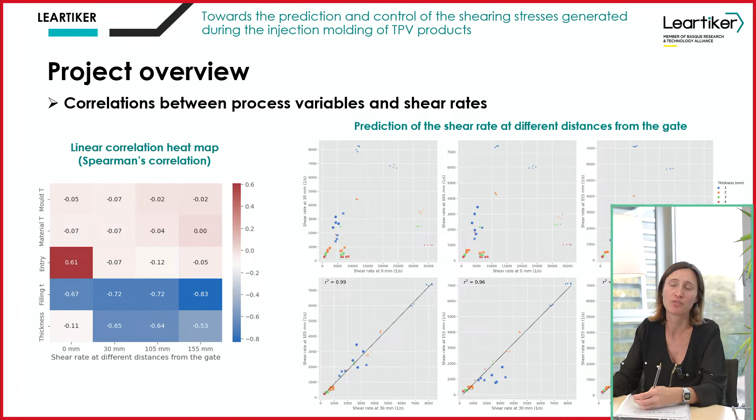Of course, as I said, we are now validating this information that Moldex gives in terms of shear rate against the mechanical performance, because we want to double check and control whether, even though the mold temperature has little influence on shear rate, it still has influence on mechanical performance. Once we do this, we will see if, as a conclusion, we can say it has no influence, or some influence, on the quasi-static, dynamic, or fatigue behavior of these materials.